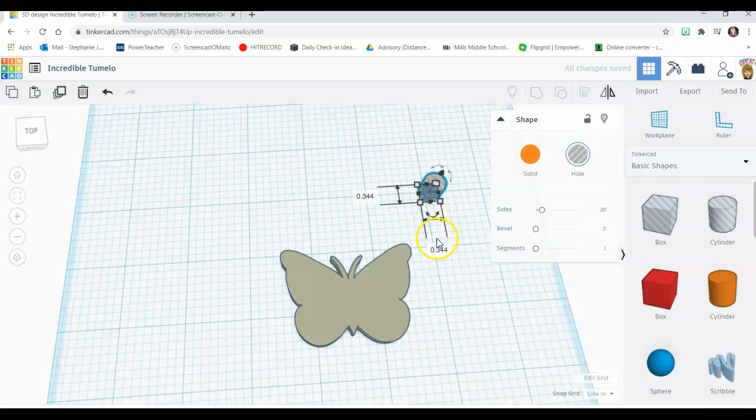I'm going to grab my cylinder hole tool and hold shift so that when I scale it down, I scale it evenly. I had mentioned in my criteria that you wanted your hole to be at least 0.2 to make sure it was going to be big enough to run your keyring through.

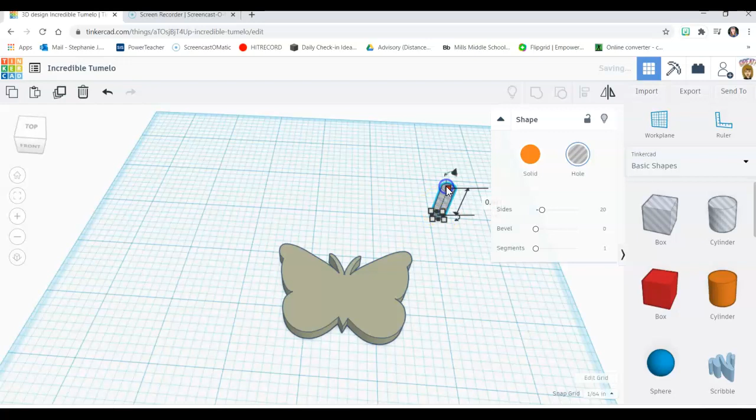So I'll do 0.2. And then because it's scaled very short, it'll probably be shorter than my butterfly, so I'm going to drag it tall and pull it into where I want it to go.

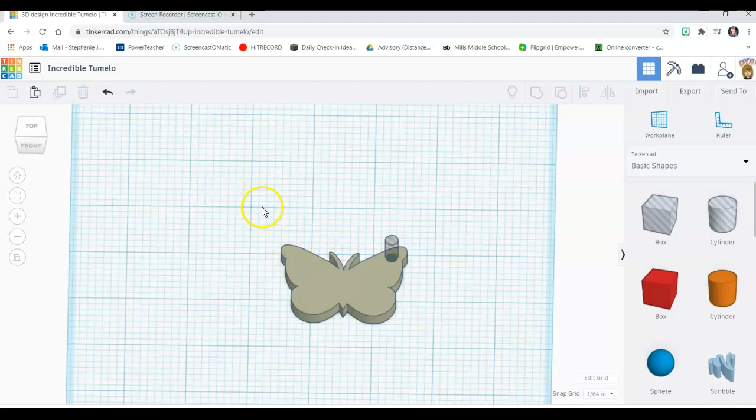I'll look at my top view. Right now it's in a perspective view. If you want to switch to flat view, you can see really clearly where that hole is exactly going to go. Then in order to cut out that hole, you're going to draw a box around both objects, or select both with the shift key and click group. So now I have a hole.

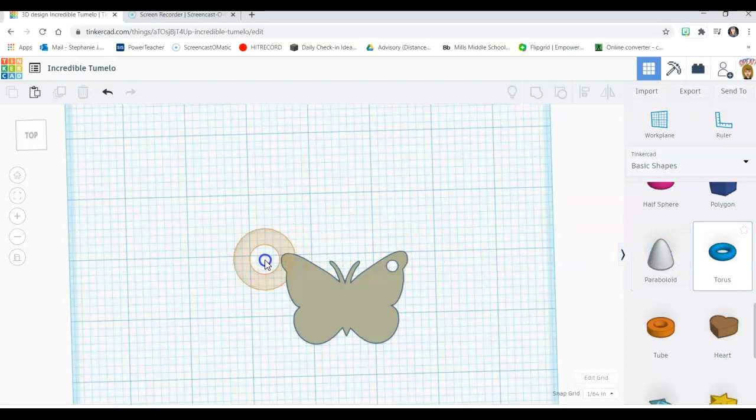Another way would be to use some of these tools to create a keyring. You could grab the torus tool, or the tube tool works pretty well as well. You've got this little arrow up and down that gives you some more control over this shape. You can play with the radius to see what happens, and you can play with the tube. You can play with the sides.

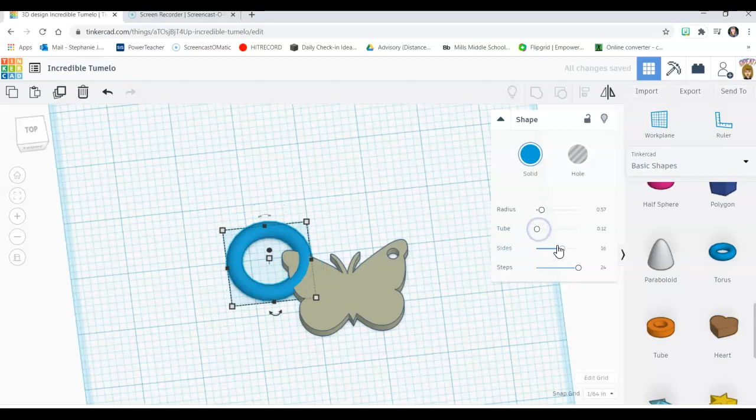This is kind of fun because it kind of gives it a more geometric shape. You can also play with the steps that actually kind of give it more of a, you can make some different cool looking ideas here. So find what works for you.

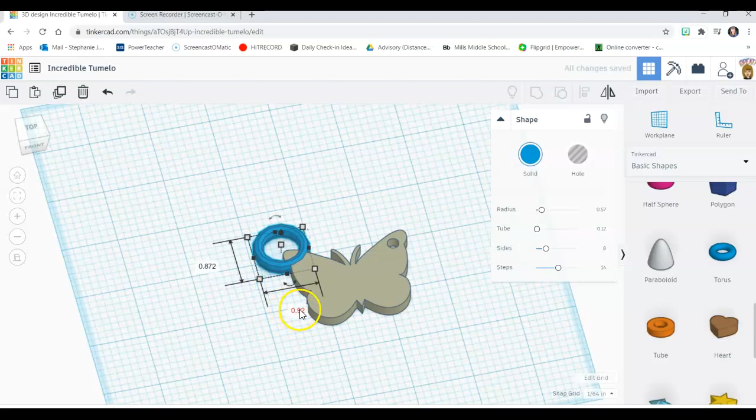Scale it down to the size that you like. You can click on these numbers to make them the same. So if I wanted this to be like 0.75, click here, 0.75. Then it would be good to probably make them the same height, so you can click on it here and change that number. My butterfly was 0.2, so I'll make my ring 0.2.

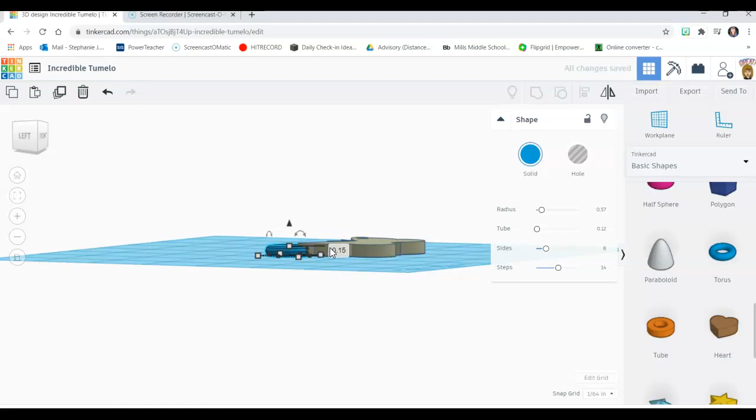You could even make this a little bit lower if you wanted to. What you don't want to do is lift it up, because then when you go to 3D print, you're asking the printer to print out in the middle of the air, which it does not like to do. It'll completely mess up. It can build a support up to it, but then when you break away the support, the back side of this will be very bumpy.

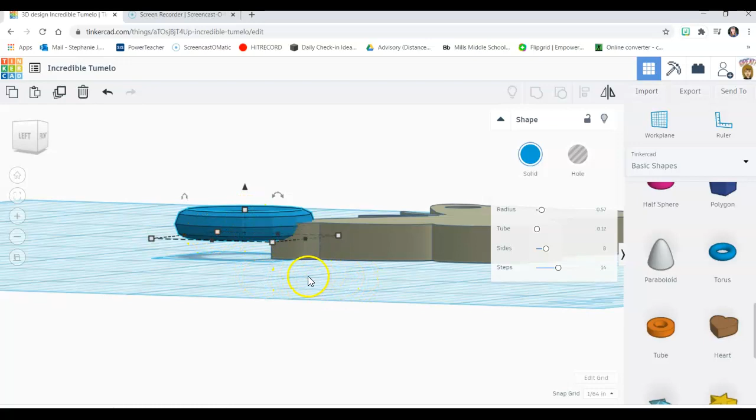So if you want to make sure it lands exactly on the bottom of the work plane, while it's selected, just hit the letter D and it will drop down. You can play around with that, make it the same size, or make it smaller to make it easier to get on and off a keyring.

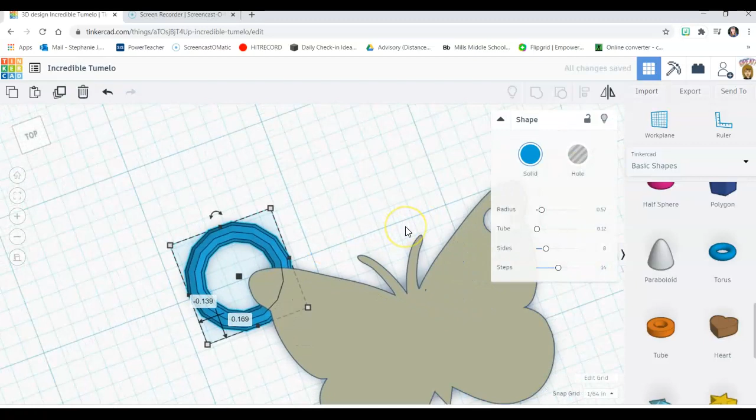Depending on where you want to put it, you're going to want to group these two things together. So I'm going to select my ring, click shift, select my butterfly, and group those together. So that's another way to make a loop.

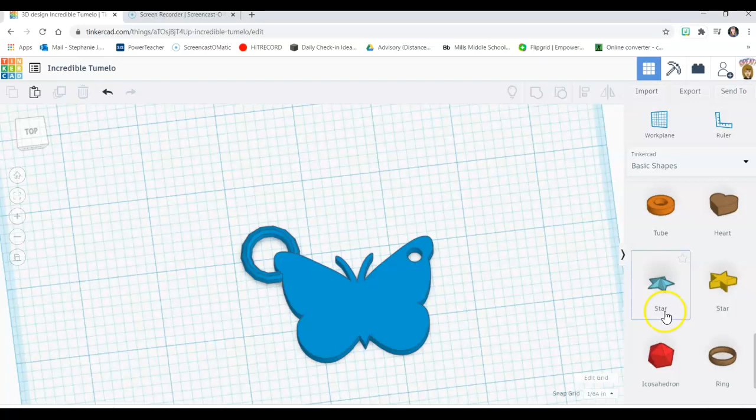And even a third way, I thought it could be kind of fun. You could use that tube tool, there's also this ring tool that makes a really nice skinnier ring if you want it to be thinner to get on and off. You can play around with this here, change some different stuff about it.

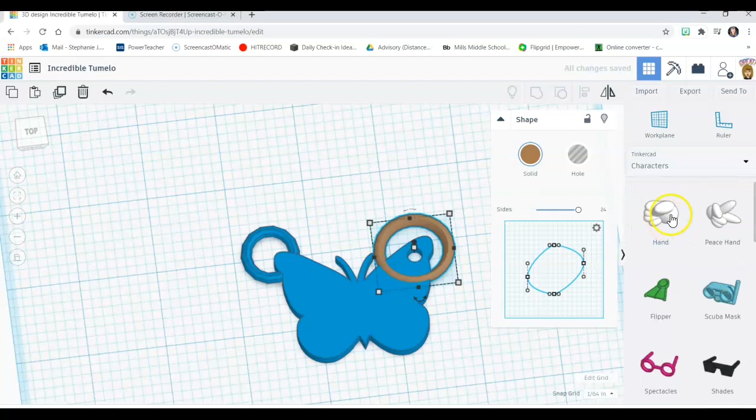But I thought even just like a letter from the characters, from the text and numbers, you could grab this letter D and even use that as a keyring. So I'm going to delete these and show you what that might look like.

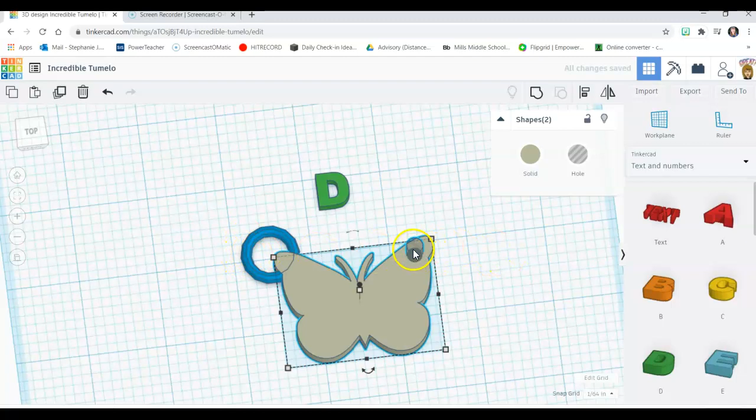If you want to change it later and you've already grouped these together, if you ungroup it, then you can start deleting those things. If I ungroup it again, even further, then it'll pull this part out. So if I wanted to keep this and get rid of this, just keep ungrouping it, and then move that one out of the way, delete it, and I'm back to a plain butterfly, and I can keep this one if I want to.

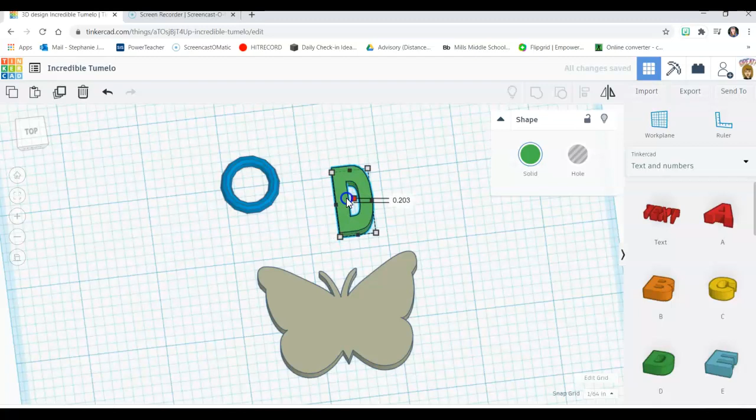But in this case, I'm going to try just seeing what I can do with this letter D, because it's got kind of a cool shape. I can stretch it out, try some different stuff here. You can spin it.

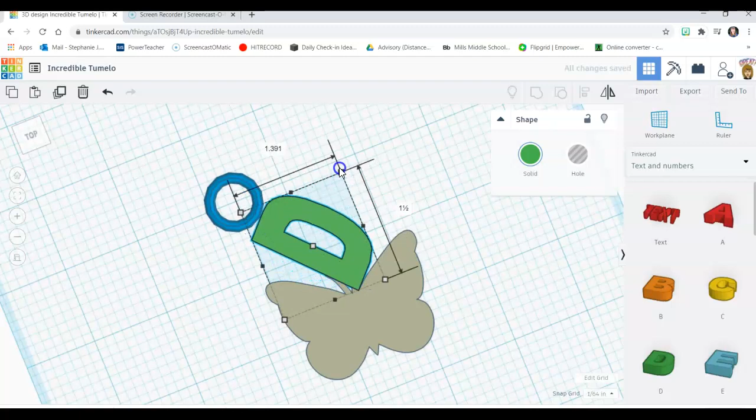And so it doesn't work perfectly for this particular idea. Maybe up on the ring here. And then I don't know if there's a way to make my D skinnier. I'm getting really silly here. I was playing around to try to see if I could make the D skinnier, and it doesn't seem to work how I thought. So maybe somebody else can figure that one out for me.

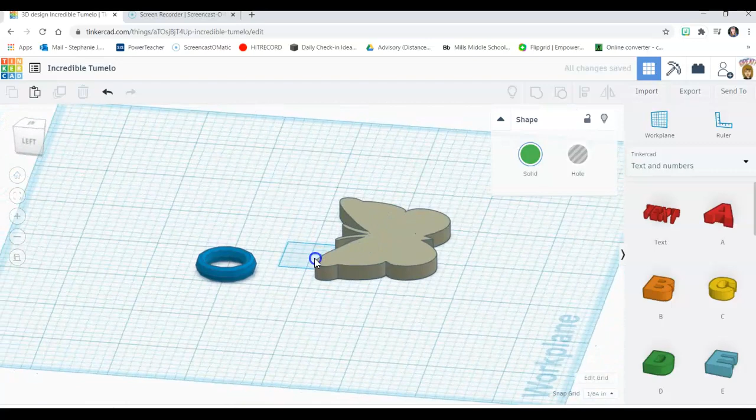But you could try using some of the letters because they have a, oops, I just lost it. Oh, there it is. I'm going to hit the letter D to put it back right on my work plane. So anyway, you can spin this to match it up with your butterfly wing. Let's see, here we go.

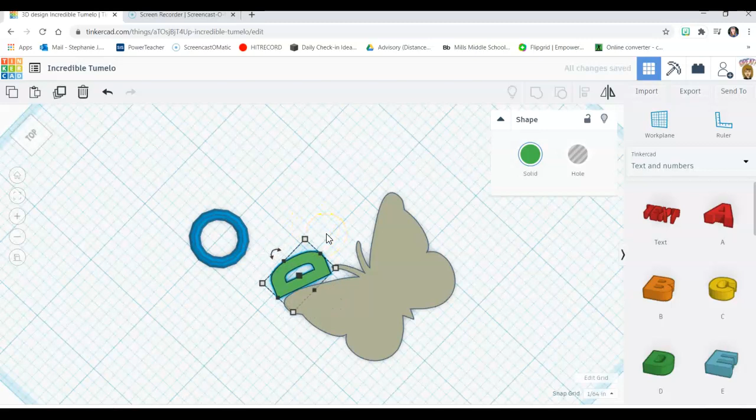And then I could incorporate it onto that. So if something like that worked for you, I can hook these together, select both of them, click join, and I guess my D was just a little bit taller. So I might have to

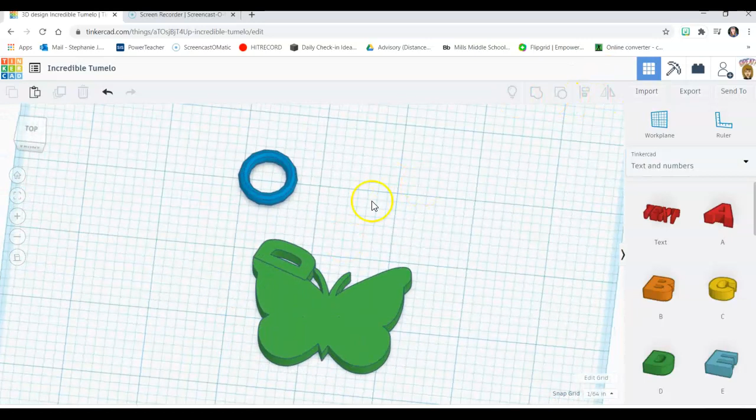ungroup that, and then grab that letter, and I gotta make that exactly 0.2 if I want them to be. Now they'll be the exact same height. Group them together. Okay, so that's just another way to add a ring.

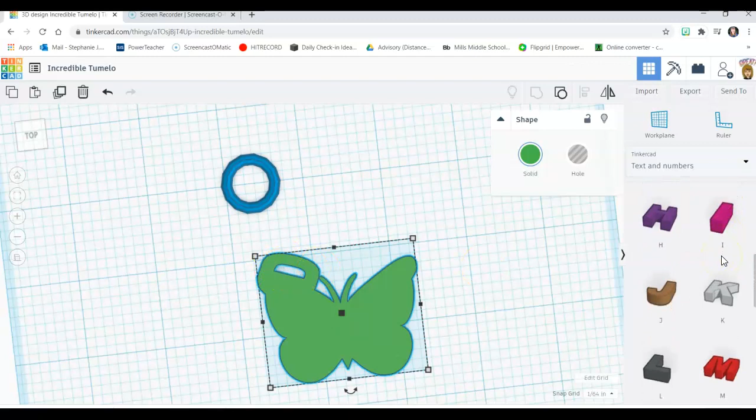Playing around, you could use the C or anything that has a hole in it. You could play around with it and incorporate it into your, the U could be useful. Spinning it around and locking it in there, you could create a little tag like that. There we go.